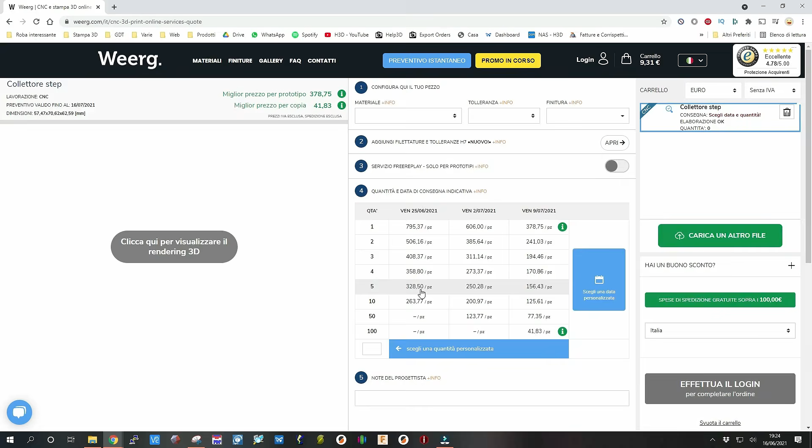The first thing was the online quote, the first ever of its kind. So getting rid of buying and budgeting conflicts altogether? Let's say it simplified the service and made it as straightforward as possible, not something for super experts anymore. In this sector there was almost a reversed relationship, where it's not the supplier who serves the client, but the client who is at the service of the supplier's needs. I wanted to change that. Getting online quotes has been the biggest game changer, giving the company momentum, and it's making it difficult for our customers to go back to traditional methods.

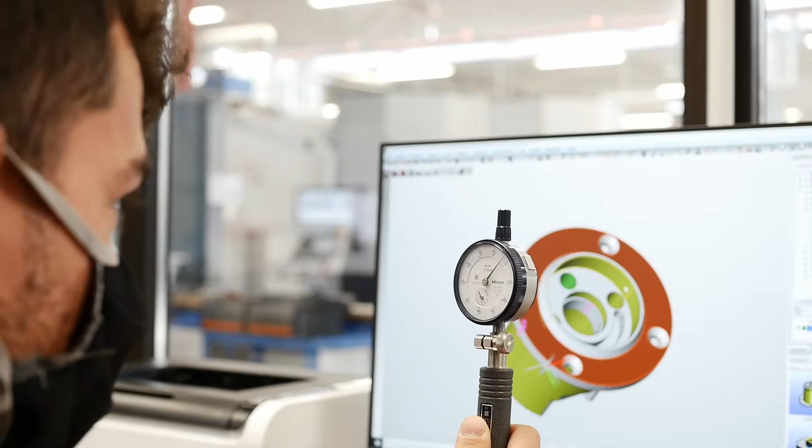Also, because the online quote lets you handle large numbers of orders, what kind of numbers are we talking about? Can you give us a few numbers? Well, let's just say there are about 20,000 quotes a day, and there's no way any human being, not even a team of 50 people, could possibly prepare 20,000 quotes in a day. I have to say that while visiting other companies, I've realized they are using our system as their benchmark. In other words, to give quotes to their customers, they're using our quote system because it's faster, quicker. A benchmark, practically. That's right.

I'll have to start charging for royalties.

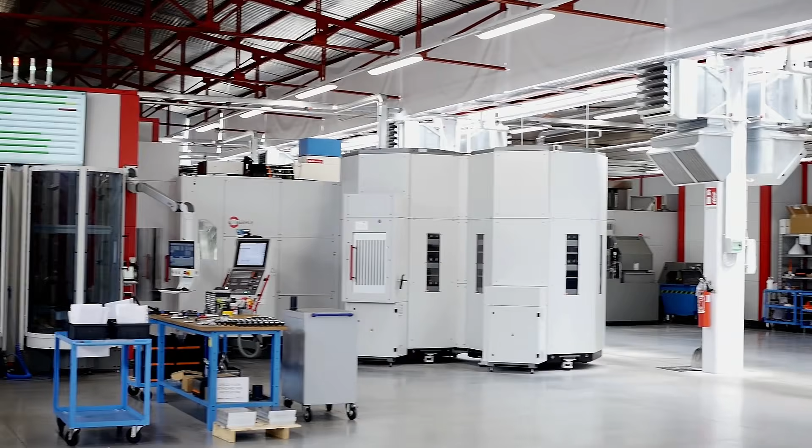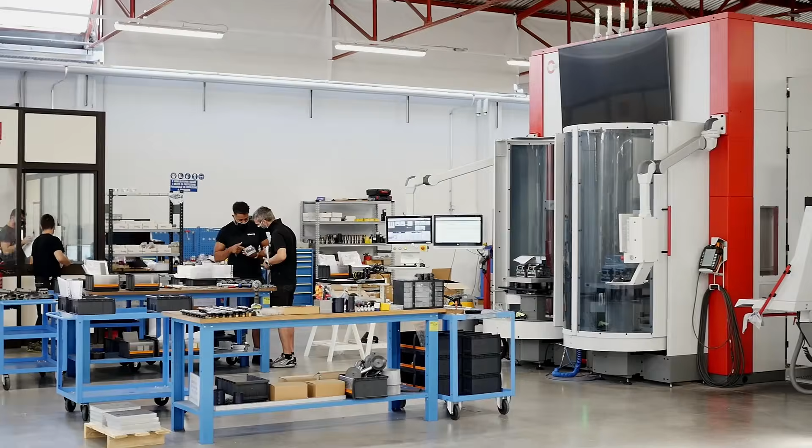Here, behind you, what do we have? I can see a big screen up there with green and yellow bars. Yes, that represents how the machines have been used in the last 24 hours. Basically, the green shows what percentage of the last 24 hours the machine has been up and running and producing parts. So does the system work 24/7, 7 days a week? Yes, it works 24 hours a day, 7 days a week. The structure you see here has 10 Hermle 5-axis continuous milling machines.

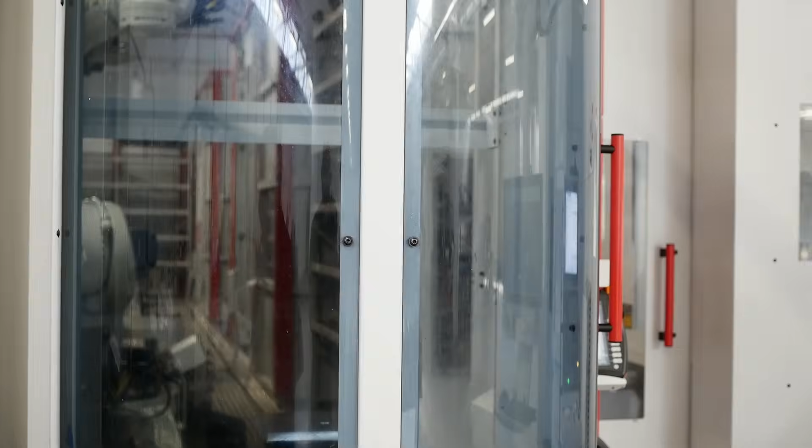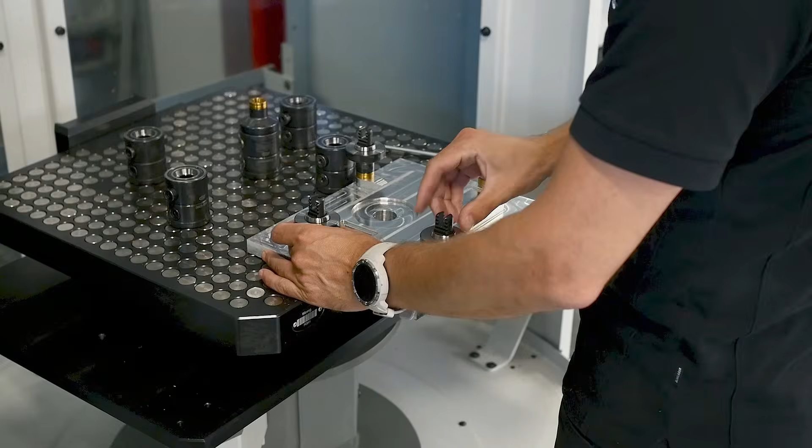2 lines of 5 machines are operated by a robotic arm that loads and unloads the pieces automatically. So even without an operator, the machine runs automatically? Right now you can see that all the machines are going and there is a single operator running 10 5-axis continuous milling machines. You can see this kind of setup at British Aerospace in England and at General Electric in the United States. And of course, we're here as well. So let's just say we seem to be in good company in terms of the level of technology.

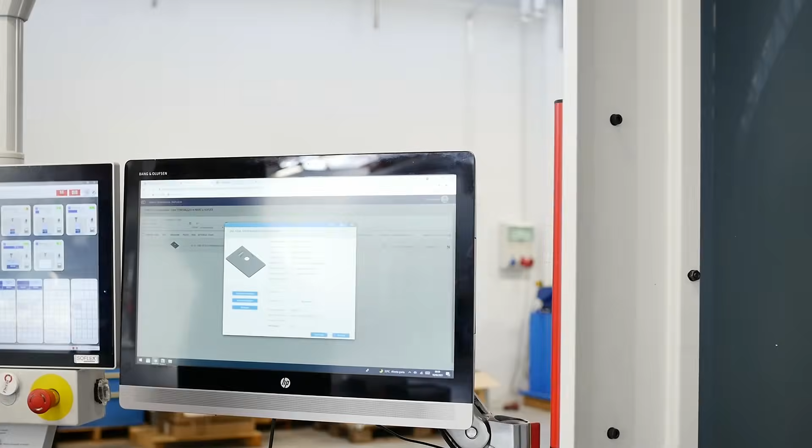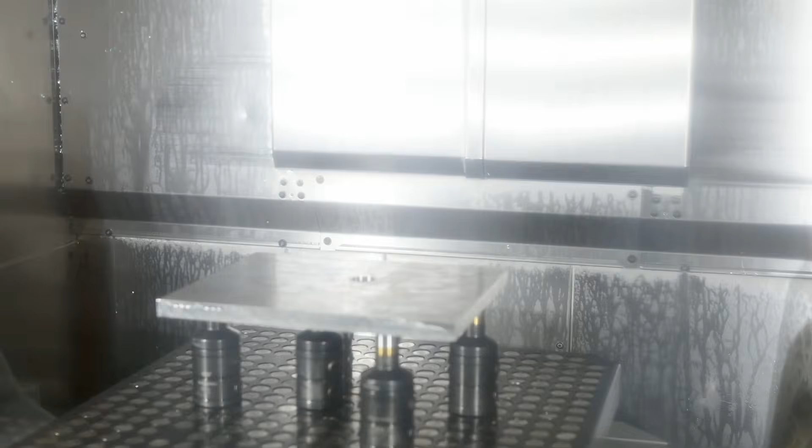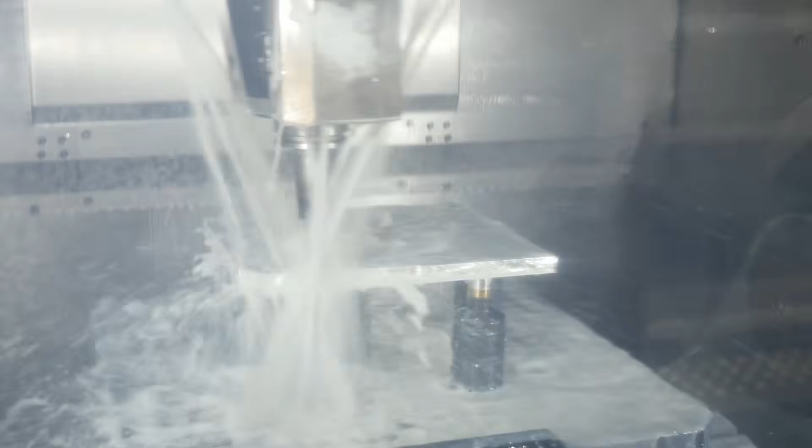So 2 lines, total 5 and 5, we have 10 machines. With how many tools working? Well, as you can see here, already from this first machine in front, there are 2 tool towers optimized to hold roughly 600 tools. 600? So all finishing processes? That's right, we never change the tools. If you go to a traditional workshop, you'll notice the machine has just a dozen tools inside, and other tools are nearby with a post-it saying when they have to be mounted by the operator. Clearly the parts are made the same, but from a human error point of view, our way of making parts reduces the possibility of human error to zero.

Then there's the thing about having only 5-axis continuous milling machines. It's true you don't always need a 5-axis continuous milling machine to make parts, however it does inherently allow you to offer higher precision and a better surface quality finish.

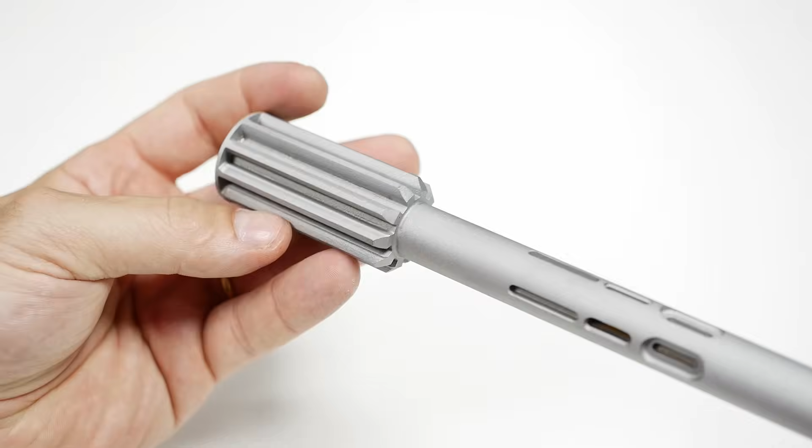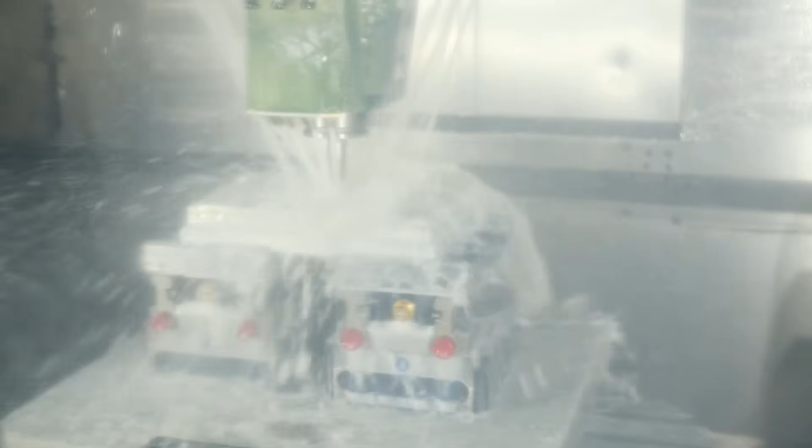In terms of materials and finishes for the CNC parts, what can you offer your customers? Well, we've got a pretty wide range of the most used materials. We've got 3 choices of aluminium, 5083, 6082, 7075. Then we have 3 types of steel, copper, bronze, and some plastics as well. I saw a Teflon bar turn earlier. Yes, we have all the materials for our calibrations, which lets us have a reasonably linear workflow. There are a lot of materials available, but we limit ourselves to materials we are sure we can get good results from fairly quickly and without any tolerance or other problems.

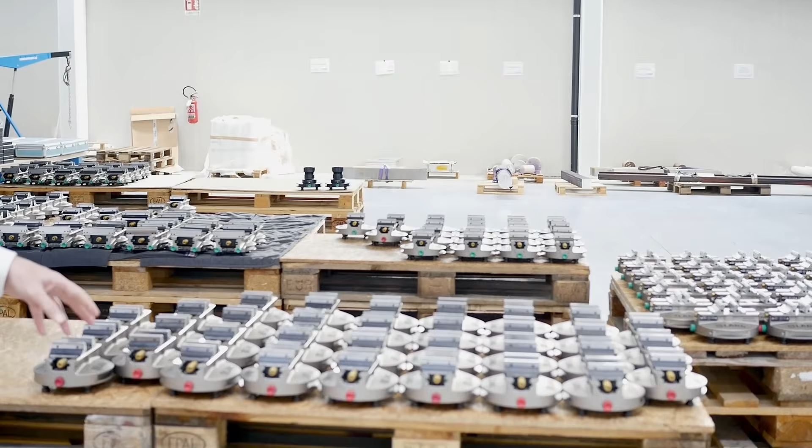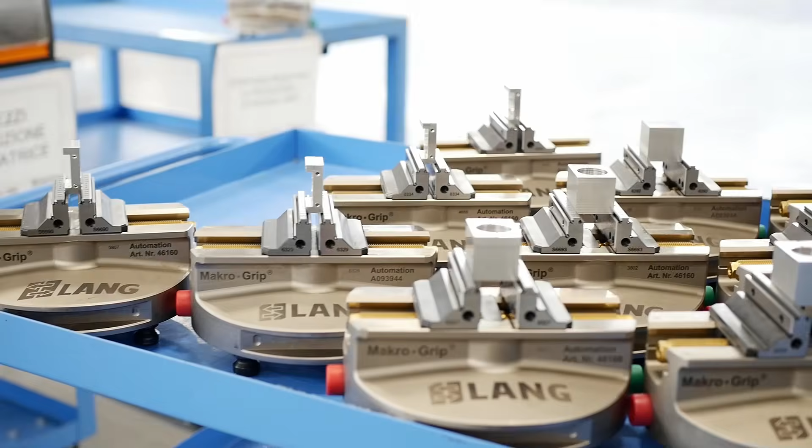Great. What is that we can see behind you? Here you can see some of our 500 clamps. 500? Yes, a small part of the 500 clamps we use. Of course, having a non-stop working cycle and considering that the machines with anthropomorphs have an internal storage.

Oh, okay. So, loaded clamps with unfinished pieces should be loaded up to 300 and 400 inside of the production line. Of the production line. Then they are loaded from time to time, and this is necessary to make a buffer.

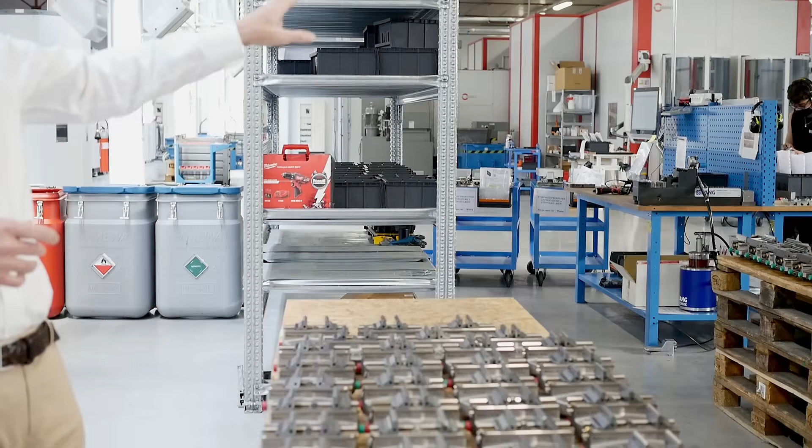Even these clamps are only used on one line because the second line, which is more modern, does not use clamps. The clamps are directly on the base plate, so the pieces are loaded from the dies automatically into the machine base plate, which further increases the level of precision. Something placed by hand is obviously less precise than something done by a robot.

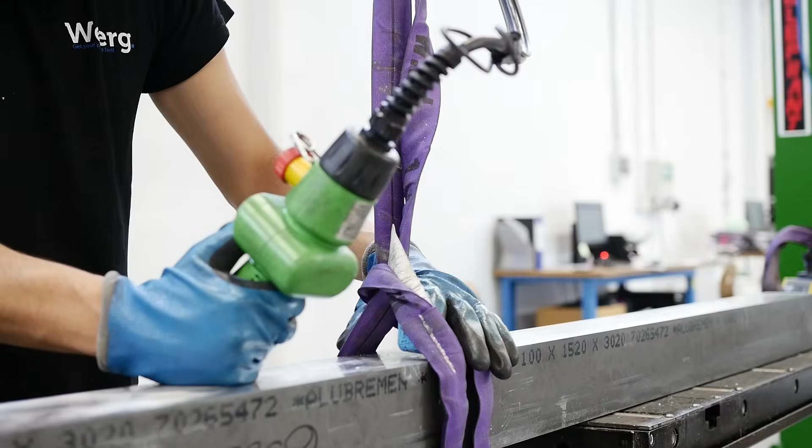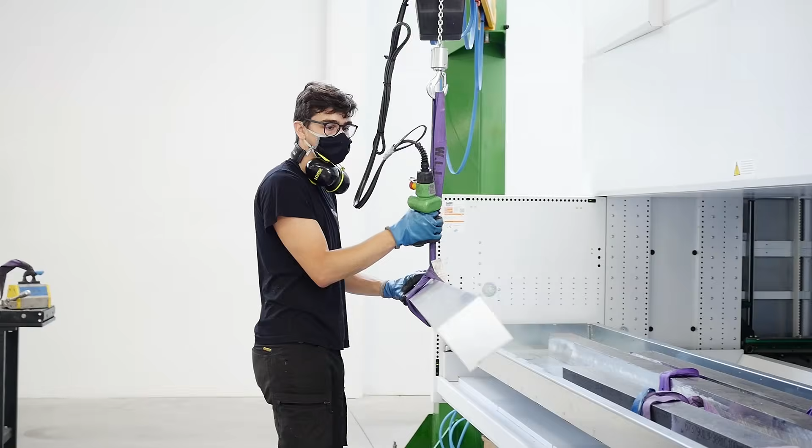In fact, I saw a guy earlier preparing all of the aluminium bars. You have this nice, enormous tower with the loading that shows you how much material is stored. That connects with the orders office, purchasing for when you have finished the material. So it's all highly automated to reduce time, costs, of course, and it's all to benefit the customer.

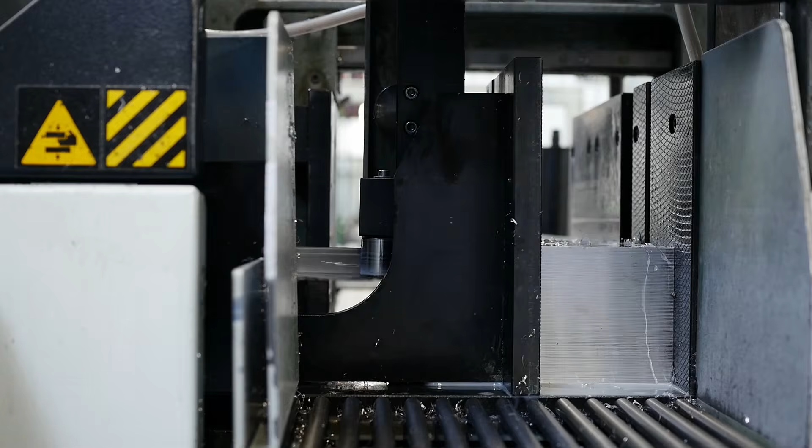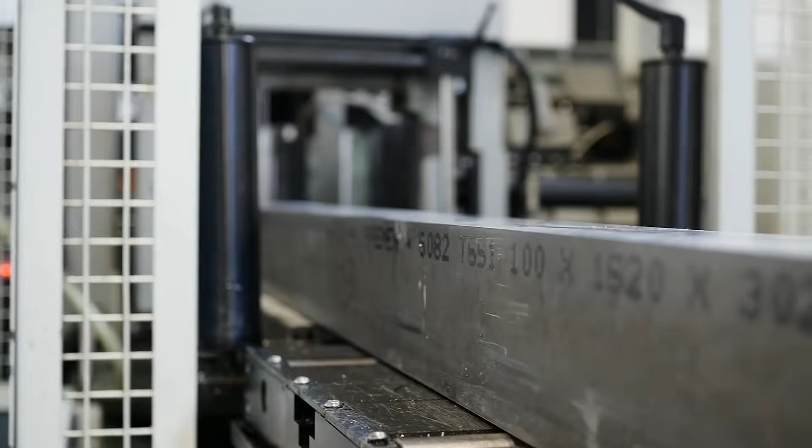That's correct. In fact, as you noticed, there is an automatic vertical warehouse where we can already choose the raw materials in the required size without having to look for them or walk around the hall or have to make them especially. And this allows us to speed up the workflow and be more efficient.

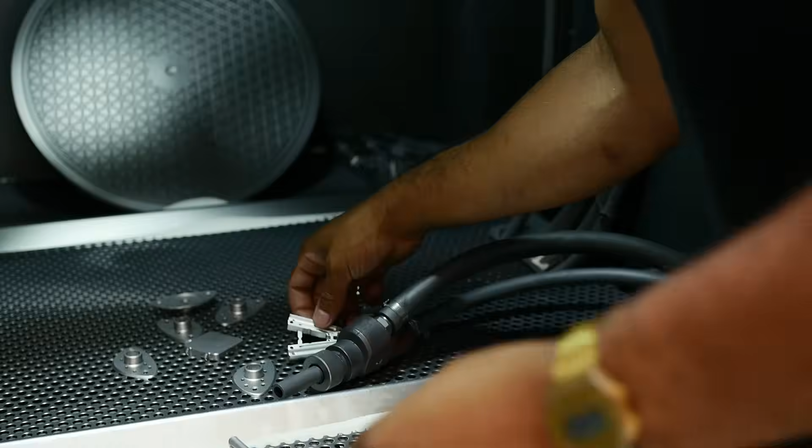We are now in the adjustment department. This means that in this department, all the CNC parts that need to have burrs removed or finishes applied, such as shot peening, we have patented our lancet shot peening, which also improves the mechanical characteristics of the parts, and all of these processes are carried out in this room.

Okay, one thing I'm missing, I haven't seen any heat treating ovens. We don't do heat treatments. Let's talk about Weerg. You may think CNC, but really, tell me a little about this. Over the last couple of years, you don't just have a CNC, but you also have the whole 3D printing part. Can you tell me something about when this whole thing started?

So, Weerg was founded in late December 2015, so let's say 2016. In 2016, we started as CNC. Not because I didn't love 3D, I already had 3 3D printers at home, but because I felt that at that specific moment in history, there weren't any 3D machines capable of generating a profit.

They were very interesting, very exciting, very tempting and inspiring, but from a purely practical point of view... Mass production. We weren't there yet. No, we weren't there, and so we started with the CNC, which in any case still accounted for something interesting.

I see a few machines back there. Please, walk me through the adventure with HP and show me the fleet. I think it's one of the biggest in Europe, right? It is the biggest in Europe for this machine model, which is the latest HP machine model, the 5210. Ah, the 5210, not the 5200.

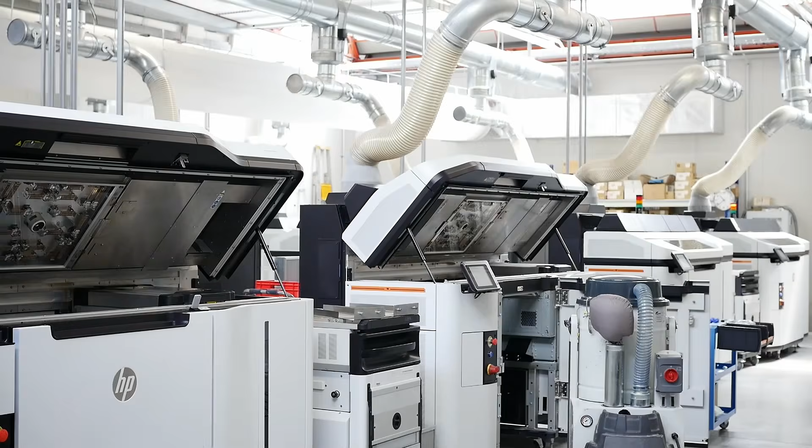So there are two models. The 5200, let's say, is the one they call commercial. The 5210 would be the Pro one, which has a number of advantages in terms of use. Okay, all right, so it's different then. It's different. It's a more advanced model, more industrial. Anyway, we'll be showing it in a dedicated video with Andrea, which will explain everything in detail.

As I said before, we started with the CNC because I didn't see any possibility of profit from the point of view of the machines that were available at the time. When HP came out, I actually started to see that something could be done with this type of machine. Not only was it very fast, but it also produced a good product at an interesting cost.

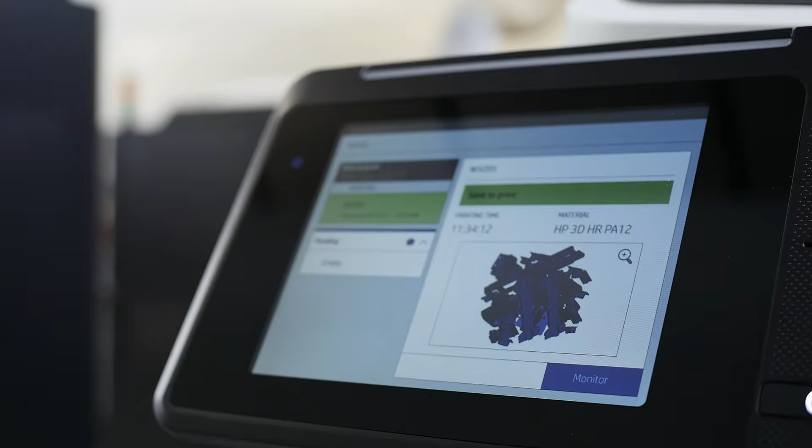So I said to myself, why not try it out? HP is a very flexible and intelligent partner with a great intellectual honesty that makes it very easy to work with them.

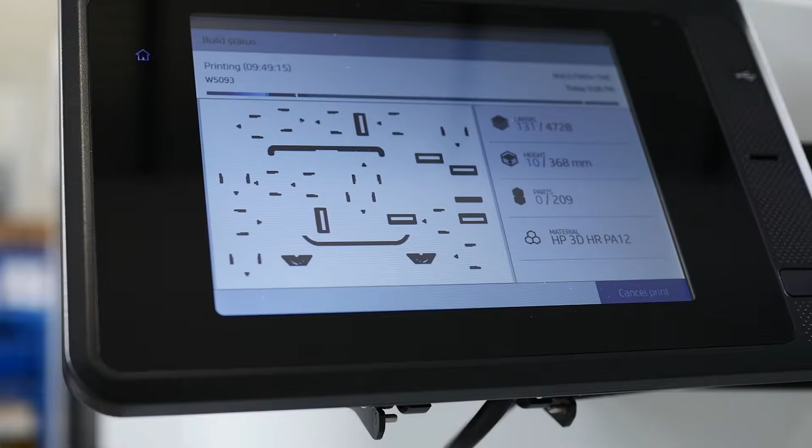Okay, the result was that one month after the first machine, which was the first installed in Italy, the 4200, right? We bought 2 more, and just 3 months later we had 6. In fact, see behind you, a string of printing jobs waiting to be downloaded. Yes, I know. We've even lost count of how many boxes we have. Let me take me inside. I'd like to see the whole thing.

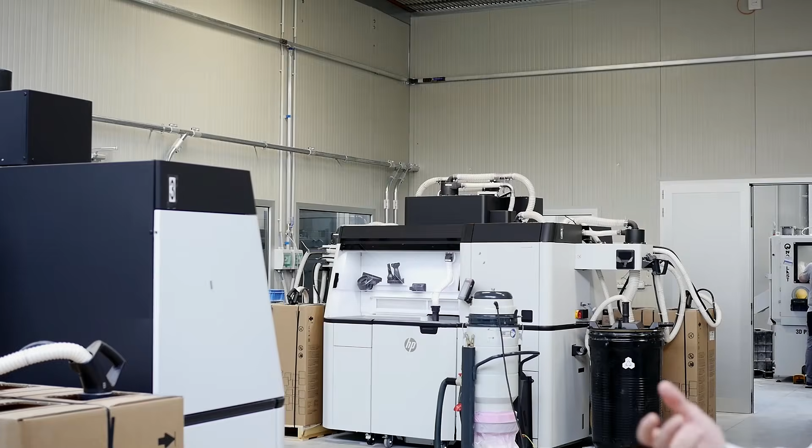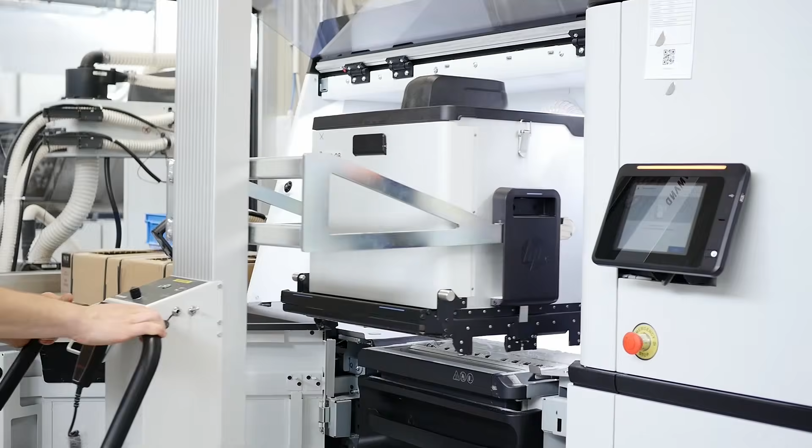In this room you can see 2 things fundamentally. The cooling stations that are designed to take the parts out of the build that have just been printed. We don't really use them anymore since we do the cooling naturally. So this rack that I see here, it's all natural cooling? Exactly. All natural cooling.

Why do we do natural cooling and we don't use the cooling stations? It takes 48 hours here, and with the cooling stations it takes 4 or 6. However, the mechanical characteristics of the parts are completely different. There can be warping problems. There can be dimensional stability problems. So we have chosen to offer our customers something that costs more for us but offers a much better mechanical and structural result.

You've got so many machines that you can manage to run other jobs anyway. Definitely. So you can guarantee delivery in 24, 48 hours? No, we deliver in 3 days. Because in any case it takes about 48 hours to cool, and the time to extract the pieces and clean them. These are not only used as cooling stations but also for extracting parts. Why don't we use them in both ways? Because we use an automatic system to pull the pieces out.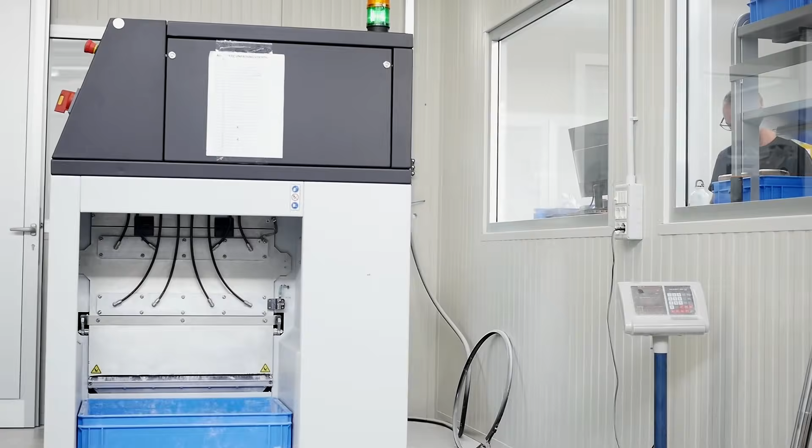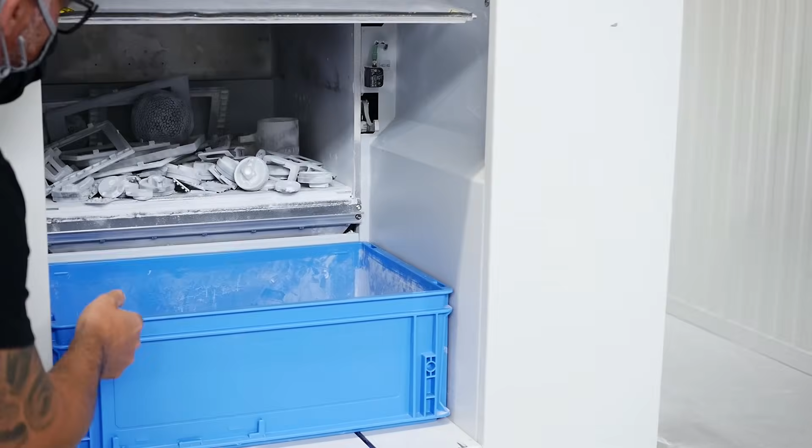This here, you were telling me, is actually a preview of what you can show us. This wasn't just that. We tested it as a beta for 6 months. Plus, this is the first definitive one installed. This is a machine that... Unloads? That's right. It unloads the build and does a thorough cleaning of the pieces. Completely automatic in about 20 minutes, and with a much better quality.

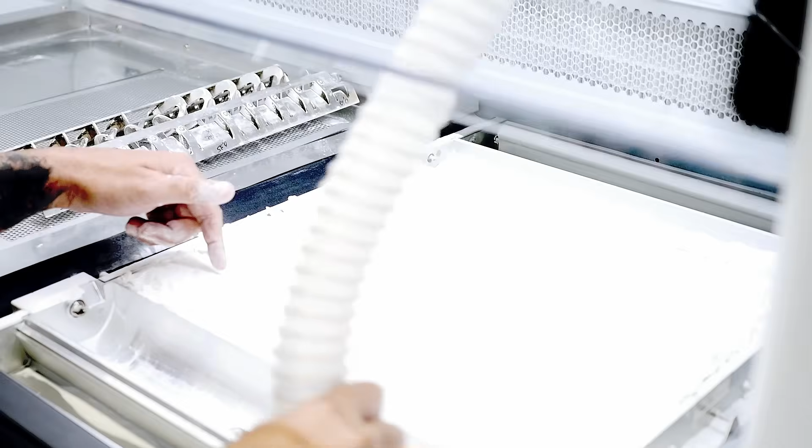Yes, now let's get moving. But remember that in the next video, I'll explain all these steps in detail. You'll see a dedicated video on the MJF process.

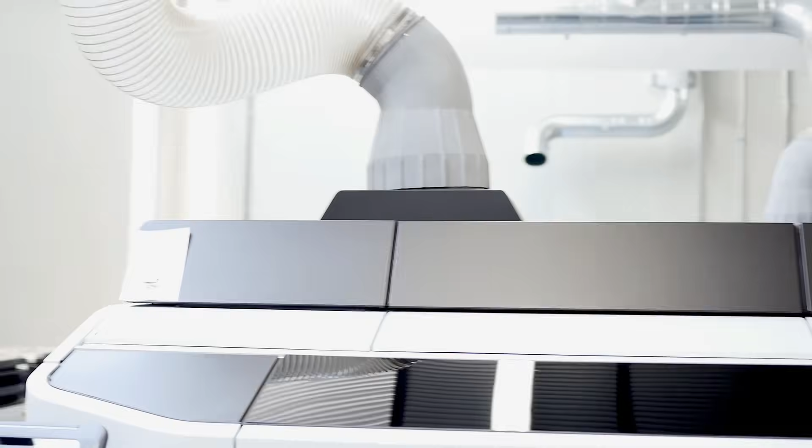Look at that. Are there 12 here? Here we have 10, but if you look at the bottom, there are 2 holes ready for the last 2 that should come in. So let's take this opportunity to remind HP to deliver. Tell us very briefly why you've chosen HP. I assume for a question of speed and mainly because of its reliability. So reliability during the process, right?

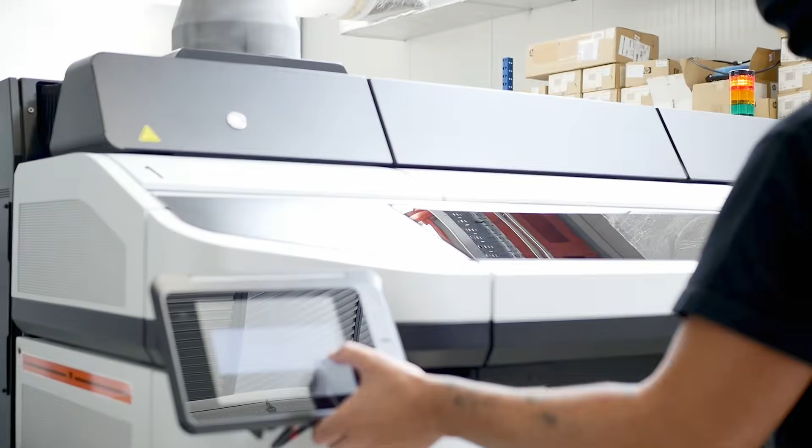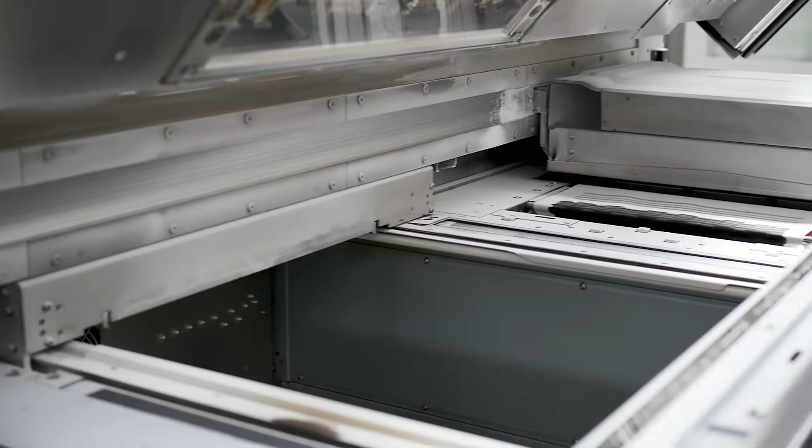I chose HP because there are no other choices if you want to get a good product at a reasonable cost with 3D printing. HP is also a real partner, easy to work with, and has really given us a huge hand in achieving these goals. We've tried other technologies as well, but it has to be said that what you get with HP in terms of tolerances, production capacity, there are no hassles. It is clearly above any other technology.

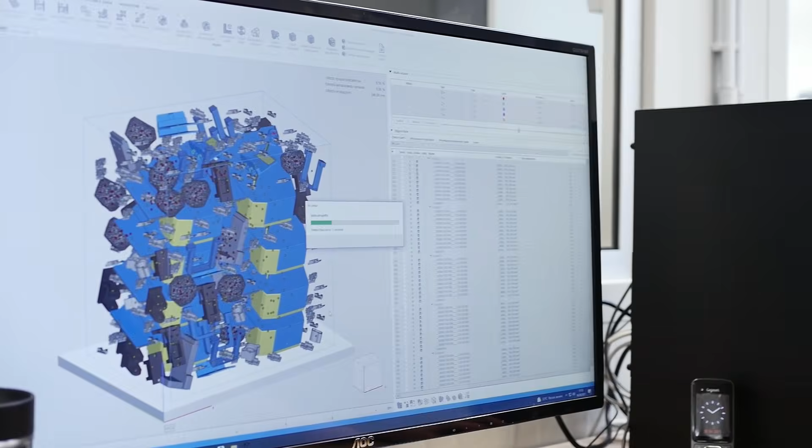Okay, to manage 12 machines, I see a person who's working on the builds, managing the builds. I saw a guy opening the machines, cleaning them. There he is. We can see him down there cleaning the machine. After that, how many people does it actually take you to manage this 3D printing plant? Two. So even here, 24 hours a day? That's right, exactly. 2 people, that's impressive, really impressive.

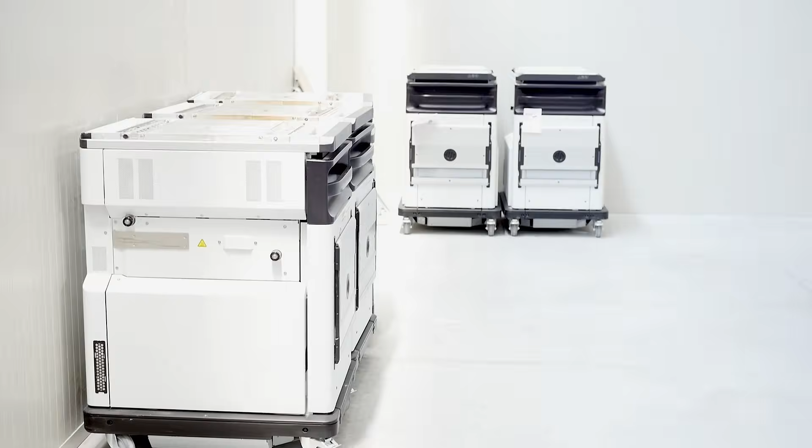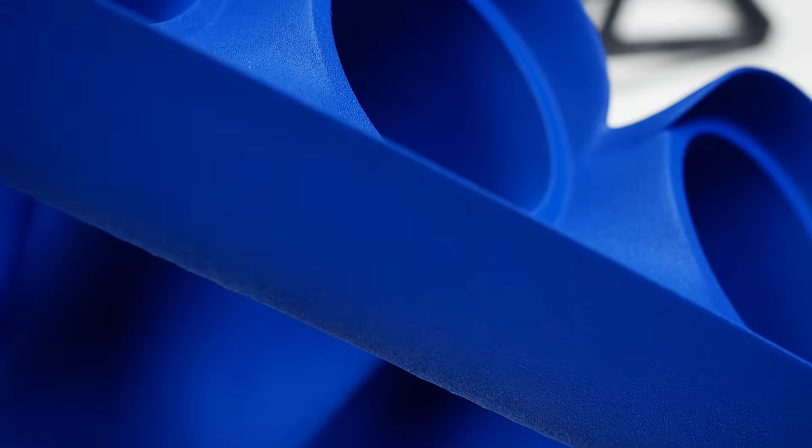Here we can see the other jobs ready to go. That is the other builds ready to be loaded into the machine and then printed. So there's already powder inside. Because let's remember, these are powder printers. And let's face it, they can run at full volume. Absolutely. So it's not like FDM or resin where you're forced to print on a flat surface, but we work at full print volume.

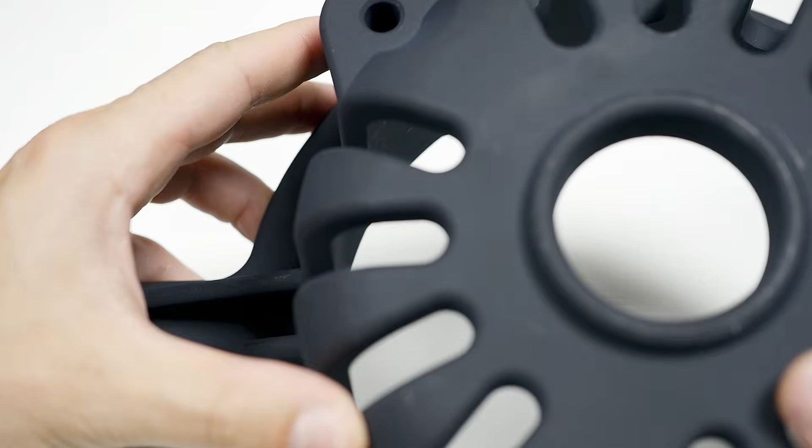One thing to keep in mind is that we really do offer a wide range of HP materials, because we don't only have the PA11 and PA12 that are the classics. They're also nylon. Let's talk about nylon. There's also nylon, exactly, but we also have polypropylene and recently also glass-filled PA12. So we have a spectrum of materials that can really cover a wide range of needs of designers and engineers.

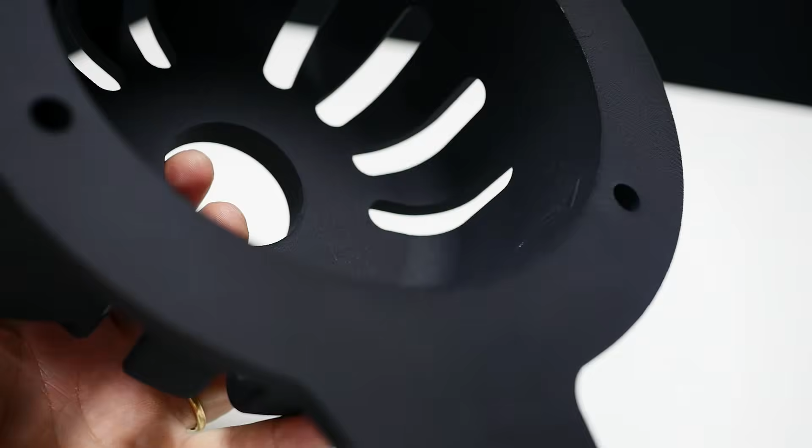So from CNC we move on to aluminium, titanium, steel, copper and so on. Then we get to PA12, PA11, PA12 with glass spheres, polypropylene. That is, whoever works with Weerg has practically all the materials and technology at their disposal, right? Let's say that we wanted to offer all the materials that offer reliability and reasonable prices. And we've left out the tens, if not hundreds, of niche materials, which would limit production and the knowledge of the material itself, and therefore could lead customers to receive products not meeting their needs.

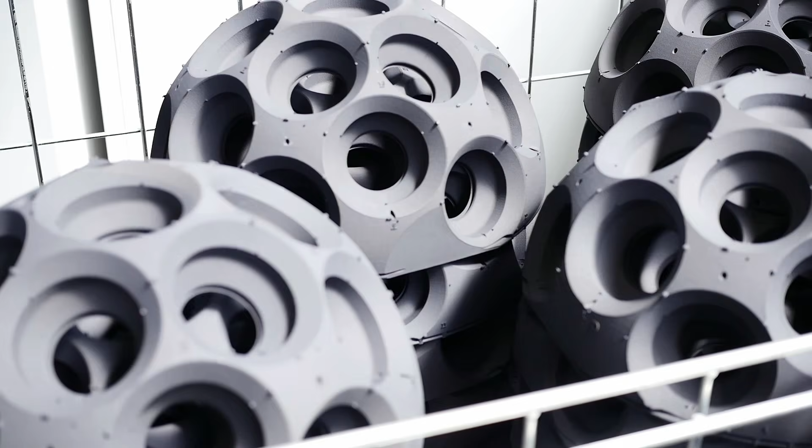On the materials we offer with HP, we have absolute confidence, and we actually have 0.1 to 0.2 of problems. Keep in mind that with these machines, we can reach production peaks of 24 to 25,000 pieces a day. No, say that again. 25,000 pieces? It's already a lot if I can normally make 20 pieces in a day with a printer, but with your system, you can make 25,000 pieces just for the 3D portion? Since there's also the whole CNC part after that, it could add up.

So, considering that we also have FDM, and so we are familiar with the production capacities of the FDM, rather than the SLA, a single machine of these produces, on average, as many as 30 FDM or resin machines. So if you calculate that there are 10, it's as if we had 300 FDM. But also keep in mind that there is optimization, and probably 500 FDM machines would not be enough to produce what we produce with these 10 machines.

Now, let's go into the finishing department. The parts that come out of the HP 3D printers are covered in dust from construction, and it has to be cleaned. We use 2 or 3 different technologies to get rid of it. In each case, spheres with compressed air shoot over the parts to clean them without affecting tolerances or mechanical properties.

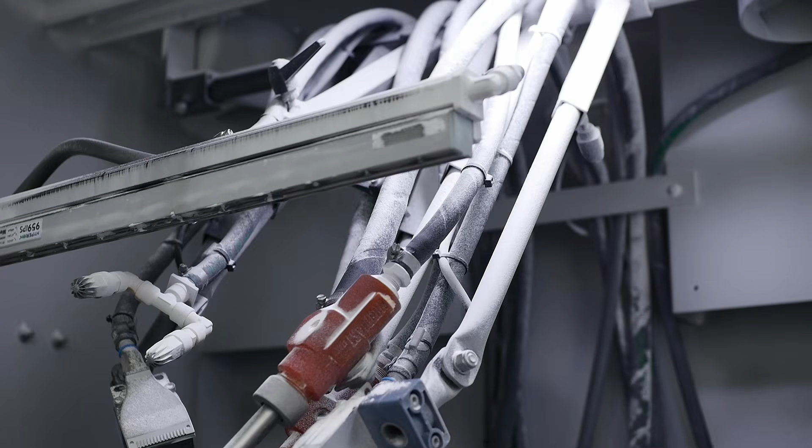This is a part as it comes out of the build. You can see that there is still some residue, and to get rid of this residue, they are shot peened with this. Let's say that this is the only partially automated process, because here I can see a basket turning. In reality, however, there's always an operator's presence.

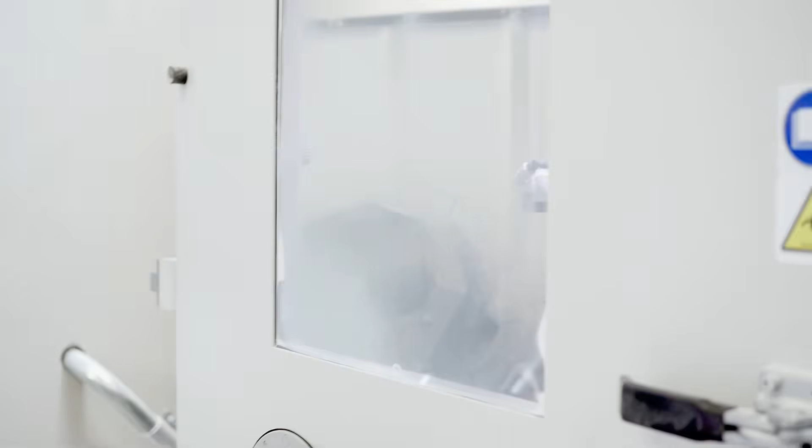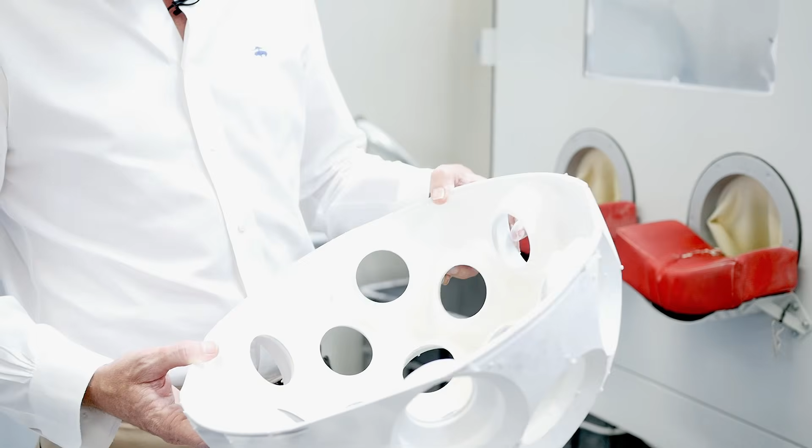Absolutely, yes. There are pieces like this one, for example. These are semi-spheres that will go to the bottom of the ocean to capture neutrinos, and we are making thousands of them. They will go to oceans all over the world. It's a project that even the most prominent newspapers have talked about. This not only proves the versatility of 3D printing, but also the durability of 3D printing, considering these semi-spheres are to go to the bottom of the ocean and stay there for years.

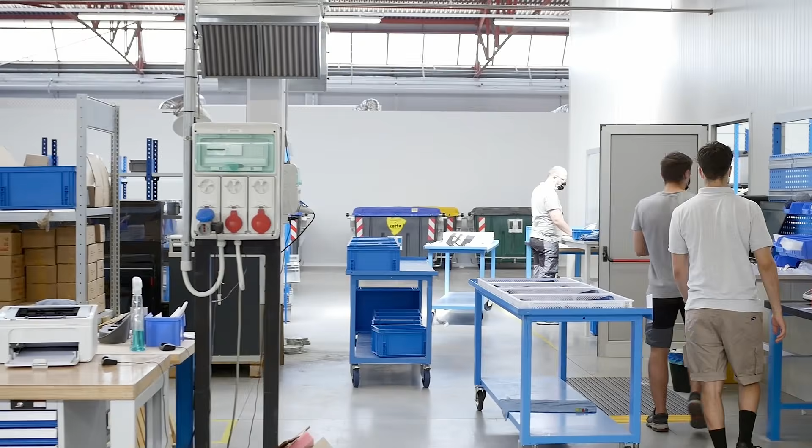So the only part that requires an operator is this one here. So the finishing process and obviously inspection and control, because the parts don't come out unless they are manually controlled by the operator. They're manually and meticulously checked by operators to ensure they meet customer specifications. They're also cleaned of construction dust. This is unfinished, right? And this is unfinished grey, or what we call unfinished grey.

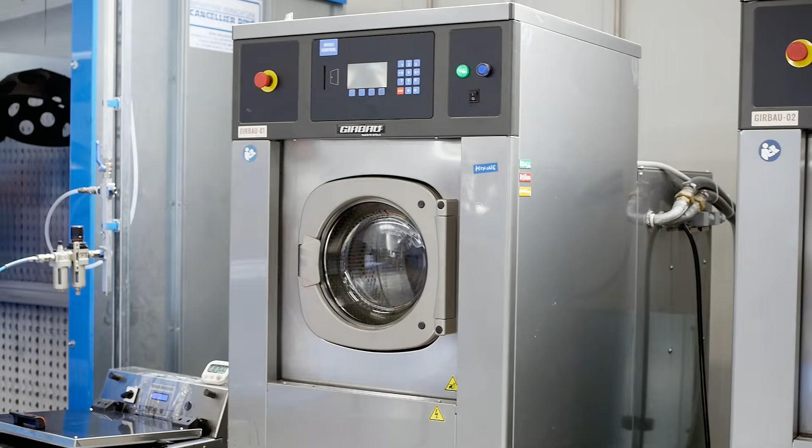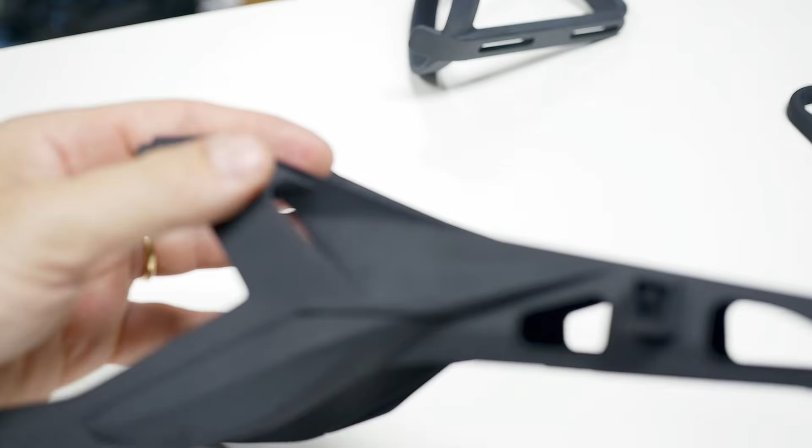And finally, the last stage of production. Are these the ones we see hanging that have already been varnished? Right? These were varnished with these washing machines, that are washing machines, but in reality... So varnishing is one of your post-production services, practically in addition to peening? Exactly, that's correct. Here it is. We have these varnishes here, but mostly black, I suppose. Yes, because with the grey base, black gives the best results.

And PA, nylon, usually absorbs. PA absorbs slightly because it's not an absorbent material, but it absorbs enough to give a very uniform and very aesthetically pleasing texture. And our customers love it. In fact, 80% of the parts are finished with this finish here. PA12 really is an extraordinary material from this point of view. It not only has very interesting mechanical, structural and dimensional characteristics, but it's also extraordinarily suitable for any kind of surface finish.

Talking about large print runs, I saw an option on the site recently called Buy the Job. Can you explain a little bit about how this works? This is a service designed mainly for other companies that have HPs and perhaps do not have the material available at that moment or have their machines otherwise employed. We provide these companies that already have nesting software and are mainly companies that already have HP in-house, but for a series of reasons still believe that it's better economically to make the pieces with us.

Really? And as far as printing goes, it's even cheaper for those who need multiple pieces at this point. Well, a very peculiar phenomenon happened because when we started with 3D printing, 85% of what we were making were prototypes and only 15% were actual print runs. Now this percentage has been completely reversed. Prototypes haven't decreased, the absolute quantity is always the same, but they've become 15% of our production.

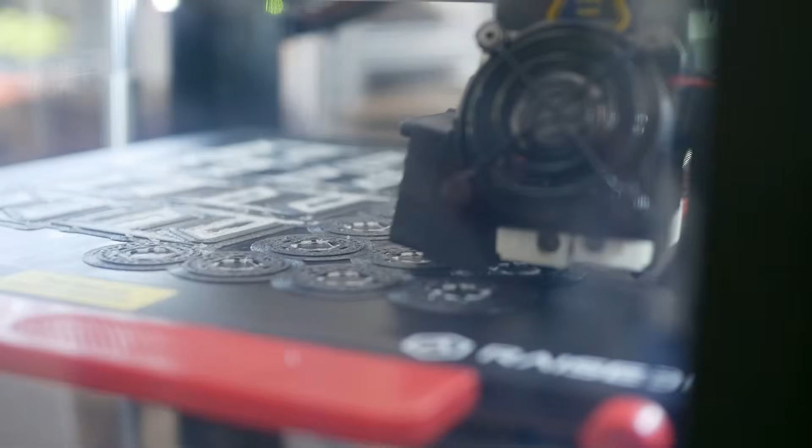Really? We're here behind you. We can see something familiar, in the sense I see resins and also FDM technology. So not only multi-jet fusion, but also FDM. We wanted to see if there was a possibility of giving customers materials that couldn't be obtained in any other way than with FDM printers.

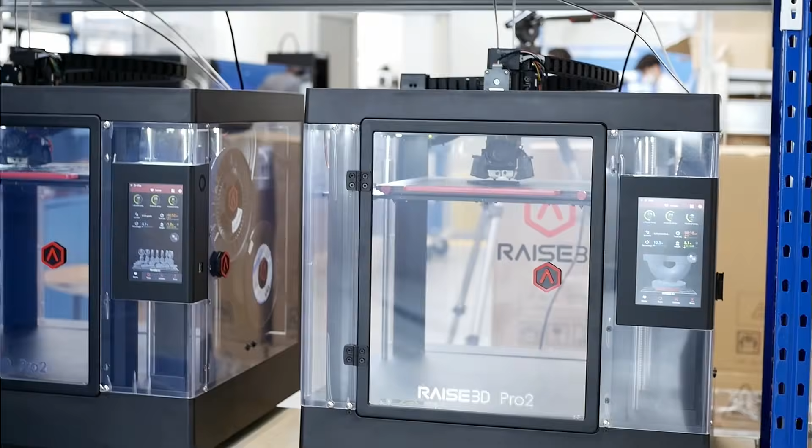So we started with Raise3D, which has given us good results, I must say. At the moment, we're using it for manufacturing parts. What materials are you currently using? So, the first material we made available to customers was Extreme Carbon Plus PA12. It's a PA12 with carbon fibre that provides excellent results in terms of mechanical strength, in addition to being very lightweight. It's a material that we introduced a few weeks ago, and we're starting to get positive feedback from customers.

In fact, after the first initial machine, as you can see, we're now at 1, 2, 3 and 4. 4, exactly. We plan to not only add more materials that can only be made with FDM, of course after testing, but we want to also increase the installed base of FDM machines. We believe that for certain niche applications they are essential.

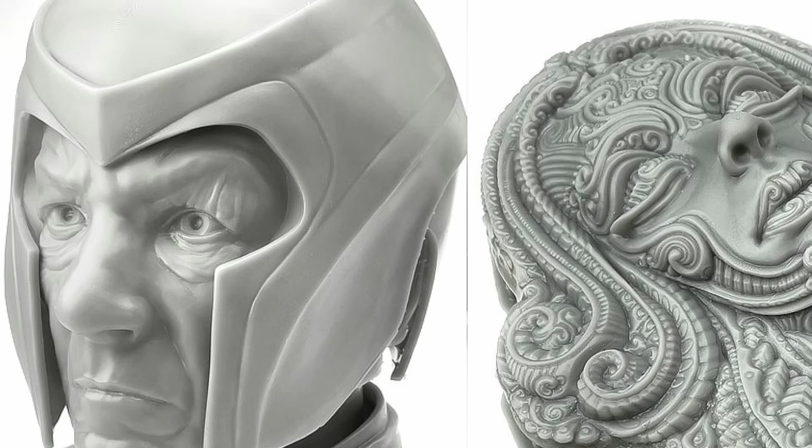Great. In that doorway where there's a guy cleaning with the sink, I still haven't gone in there. What goes on in there? It's a good thing you didn't go in there. It's full of resin machines, so the air quality inside isn't exactly the best. It's extremely warm. We added resin about a year ago, and again as something more for our customers, especially those needing detail, definition, so primarily model making, things like that.

And now we're also considering, along with our research and development department, other materials offering better mechanical characteristics with other resins. We want to see if we can meet high temperature resistance requirements rather than just mechanical resistance. Here we're entering the furnace. It's practically scorching. Actually, these machines should work at a temperature of 30 degrees Celsius, so whatever the season is, it's always 30 degrees in here.

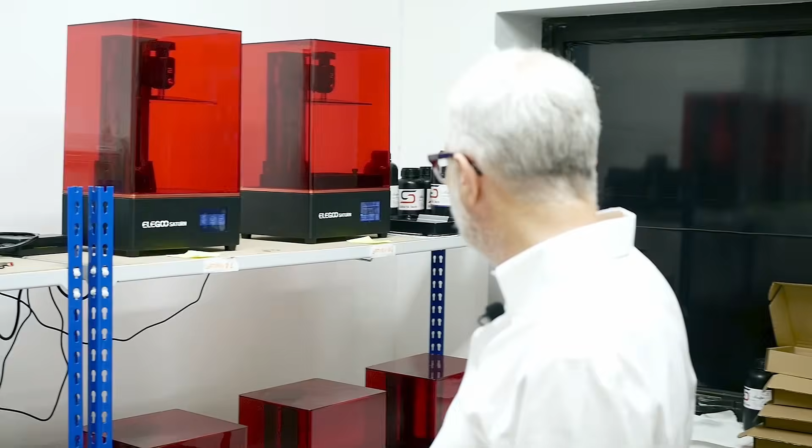The advantage is the air is like that, but it's the quietest room there is. In fact, none of the machines make any noise. Here you have a variety of dimensions, some smaller and some larger. 6 are running, but there's no noise, not a sound. We're testing new materials in some of them, and... I mean, fantastic. And here, how many do you have? 12, 13? 3, 6, 9, 10, 11... That's a lot. Anything more than 3 is already a lot. Let's say there are 17. Okay. 17.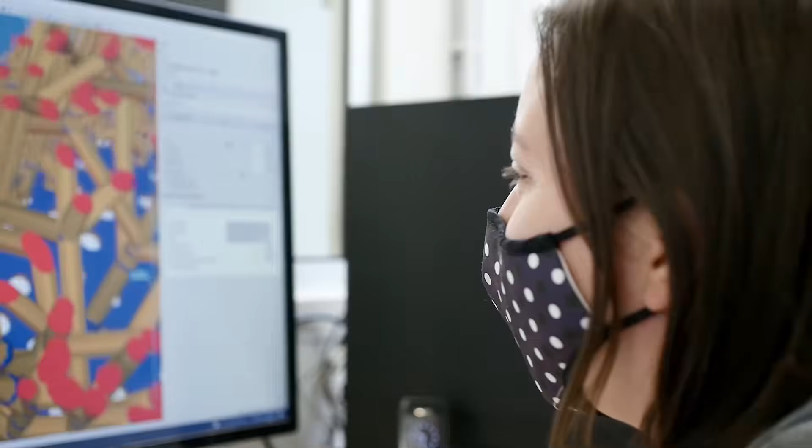How are you getting on with the resin in the end? Well? The problem is always the comparison with HP. HP is user-friendly to the nth degree. You don't need skilled operators, you don't need to know the guidelines or anything like that. Actually, they are machines that you just buy and send to print. Here you need expertise, you need know-how, you need preparation. Setting up the supports is not always easy, and the shape of the object can influence the final result. So you need very specific skills that HP doesn't have.

On top of that, production capacity is far lower. So we are fascinated by these machines. They deliver a product that is absolutely unique and not available with other technology. But of course, these machines require technical expertise. Be careful, like all the makers currently watching know this very well. Everybody knows that, that's right.

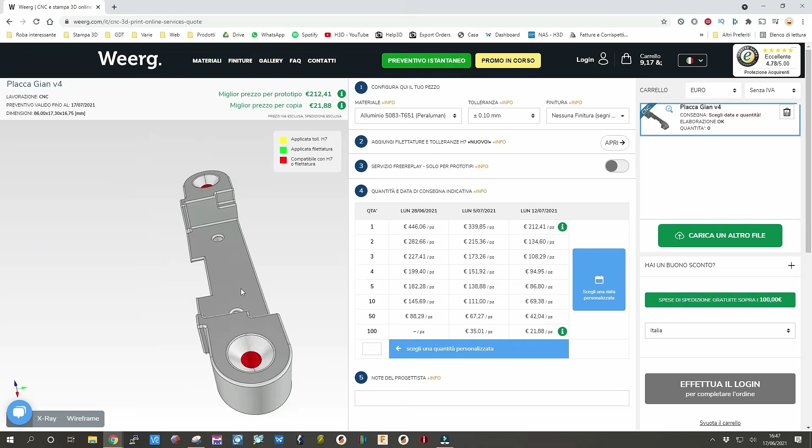So formatting? STP or STL for 3D printing and STP for CNC. Including IGES, possibly, or just STEP? We prefer just to keep STEP. Perfect. Because we've noticed that, we try to make sure that what comes out is exactly what it is. By the way, a nice little feature. In the CNC quote, you can now also select zones with tolerances, right? Absolutely. The software automatically detects the zones that can be made with tolerances, and it's up to the customer to click on them to choose what they want, or they don't have to click at all. I mean, it's insanely simple. Yes, we've tried to make things as simple as possible, but I won't hide from you that behind that kind of simplicity, there's a huge amount of complexity.